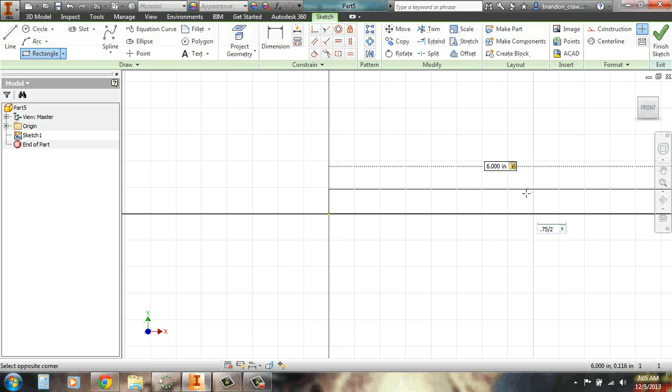So what I'm going to do, it needs to probably be at least 6 inches long for it to be a correct mallet head. And if you remember, in the mallet head we made a hole, and I made that hole 0.75. So whatever you made the hole, it doesn't matter. But if you're revolving it, that means you want this to be the radius, so we need to divide this by 2. What that'll do is when I actually revolve it around itself, it'll make it 0.75. So 0.75 divided by 2, and that puts that at 0.375.

Now I want to add some design. Remember this last inch here, if you look at this square, about that last inch we should leave alone. That's where we're going to put the threads, that's where the handle is going to go into the mallet head. But everything else is kind of fair game.

So I don't want to go too far down. If you go too far down, then there's not going to be much material left to actually be part of the handle. But I can make some different shapes.

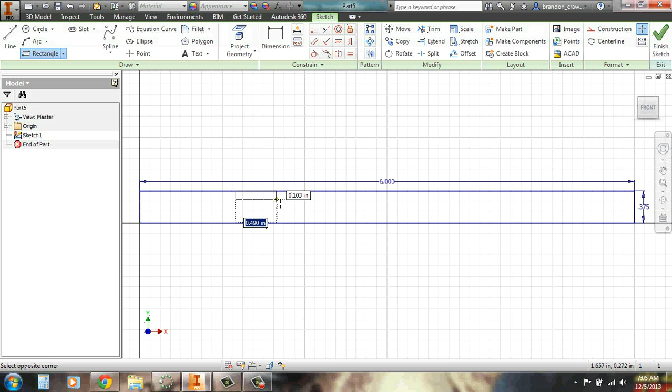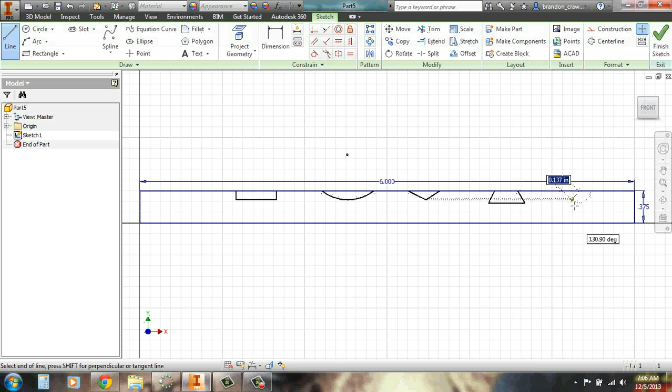You know, I can make an arc. I can make more triangles. So you make all kinds of different shapes, whatever you feel like making.

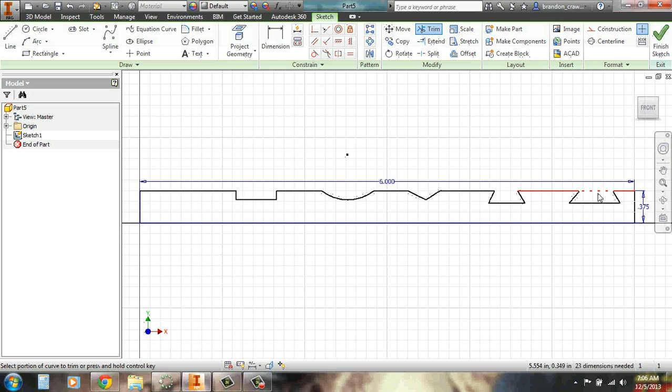Now, you don't have to most of the time, but every now and then there's issues if you don't trim. So I click this trim button up here, or you can just right click and click on trim. I'm going to trim all those pieces out that aren't going to be part of my mallet handle. Right click, OK. So now when I spin this rectangle, or what used to be a rectangle, around this line, all those pieces are going to spin around it too and make a little bit different of a pattern.

So I'm going to revolve it. Again, it's going to say what profile. It didn't really even give me a chance because this is the only profile here, so it automatically selects it. If there's more than one profile, if I had left one of those lines there, I would have had to select this because it would have been wondering, do I want this or do I want this? Now what axis?

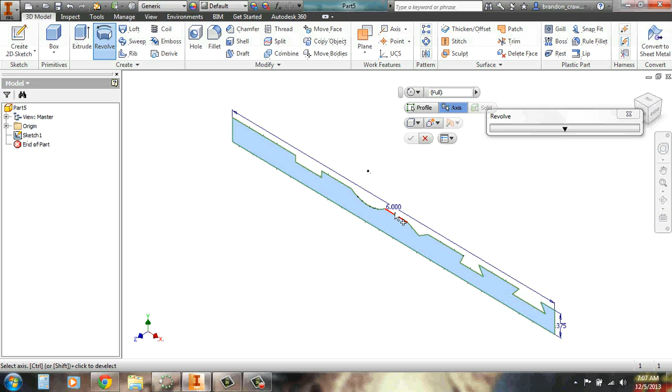I want it to spin around this. If it spins around this line, all of those features I just made would be on the inside and they wouldn't really show up. So I want to spin it around this way. That does is allow me to have my handle.

Okay, now again, this is a kid's toy. I would go through, chamfer these edges. I don't need to worry about this one because that's going to go into the mallet head.

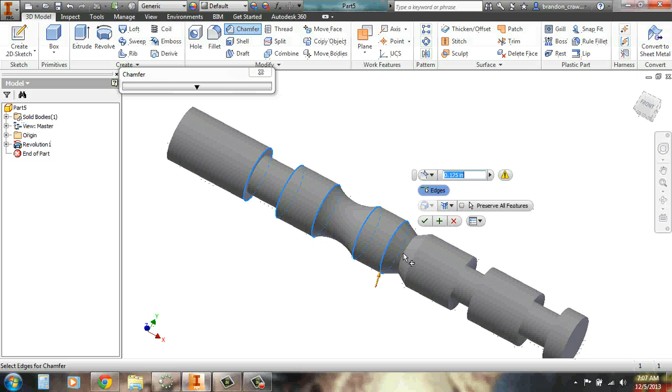Now you notice it's not doing anything, and that's because this chamfer is too big for how small this handle is. So what I'm going to have to do is, now that I selected all those, see how it's got this little exclamation point here. It's saying you can't chamfer that much. If I chamfered that much, it would go into the structure. So I'm going to set that at 0.125, about half of that, we could just do 0.125.

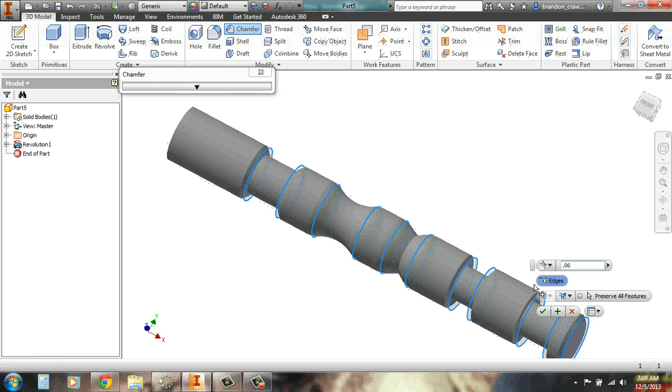Let's see if divided by 2 works. No. So let's just do 0.06. Okay, those work. It chamfered them. We're good, I'm going to go with that. Now they're a little bit rounded, not quite as sharp. We're good to go.

Last thing we're going to do, I'm going to add thread, which is right here, to the end of the handle. Now I don't need it to thread all the way down because remember my hole was only 0.75 inches deep. So what I'll do here is I don't need it the full length.

So I'm going to unselect that. Let's just say how long do you want that to be? Well, 0.75 is my hole. I don't want the threads to go that far down because it'll still stick out a little. So I'm going to do 0.5 on my threads. And I'm going to do it from...

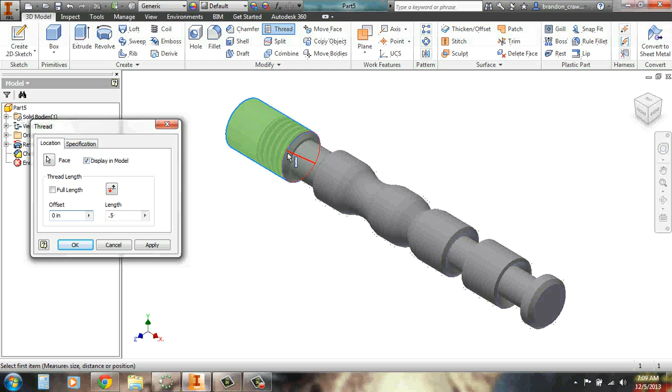It's not selecting the right face. Here. Thread this in. And I want it to be 0.5. I'd clicked down here apparently, I clicked on this line. What that did was it was coming from that way. I wanted to click the side.

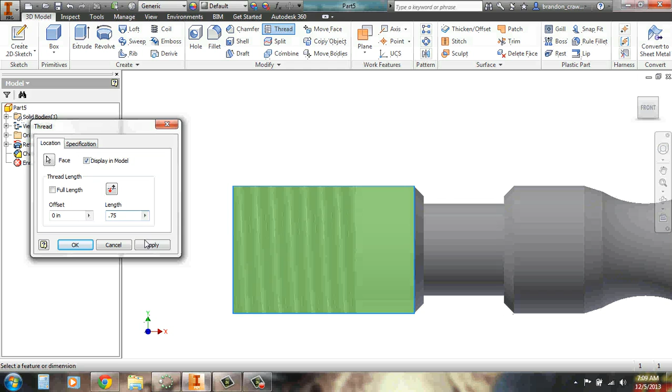Now 0.75 is probably a little too long. Like I said, I want this to actually be 0.5. So there we go, all I have to do is double click on that, and I can change it. So now I have my handle threaded. Everything's done for my handle. Everything's done for my mallet head.